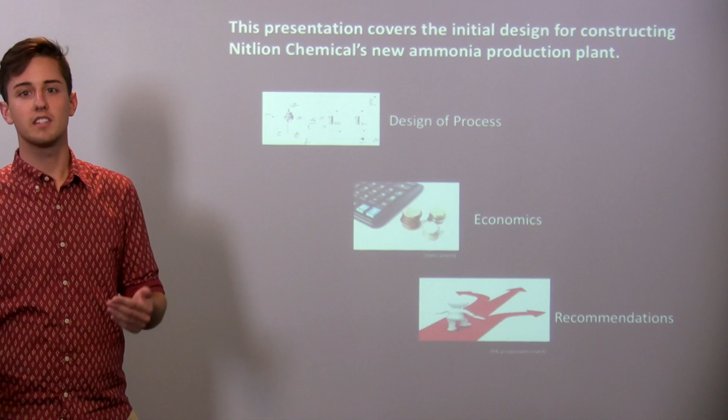This presentation covers the initial design for constructing our ammonia production plant. We're going to cover the design process, economics, and recommendations that we have to continue with the design after our team is finished. Andrea is going to talk to you a little bit about some background for our plant.

Nitlion Chemical is planning to produce an ammonia production plant in Philadelphia. We're hoping to produce ammonia at over 87,000 pounds per hour. We chose Philadelphia as a location for our plant because it's right along the Delaware River, which makes cooling water much cheaper, and cooling water is one of our biggest utility costs. Also, Pennsylvania is right above the Marcellus Shale, which makes a methane feed much cheaper.

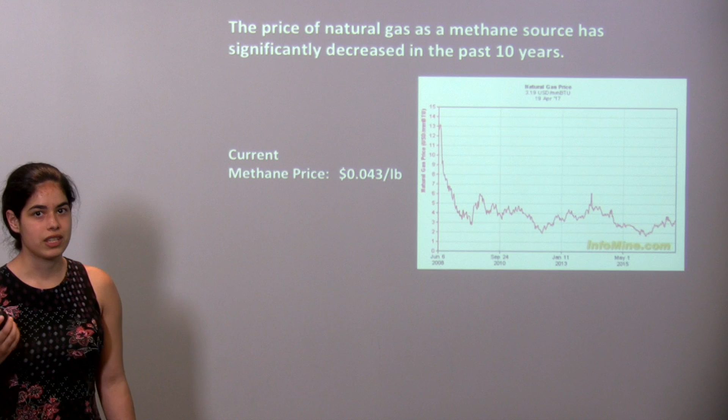Methane has been decreasing in cost over the past 10 years, mostly due to increased fracking and fracking technologies. It is now at 4.3 cents per pound.

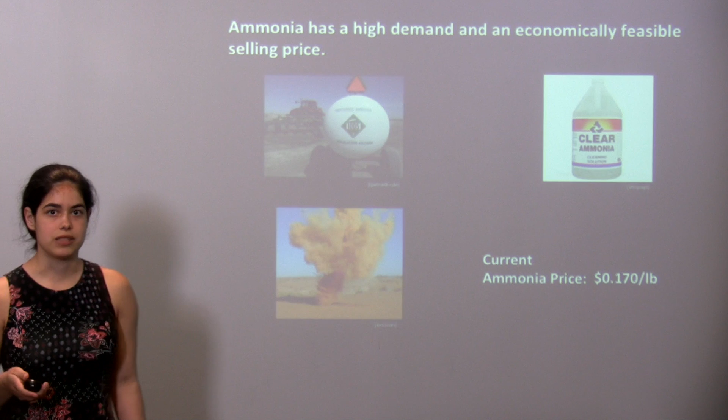Ammonia has many different uses. The main ones are fertilizer for agriculture, explosives, and different chemicals like cleaning detergents.

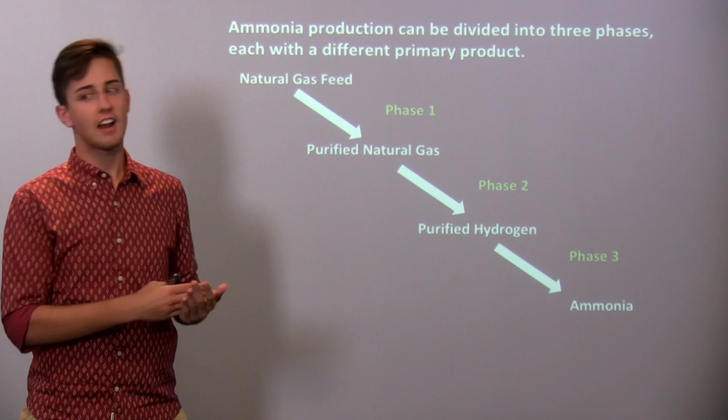Our ammonia production process is divided into 3 phases, each with a different primary product. We take our natural gas feed through phase 1 to get a purified natural gas feed, removing some toxic components. We take that purified gas feed and make it into purified hydrogen, required for the last step - that's phase 2. In phase 3, we take that purified hydrogen, combine it with nitrogen, and make our ammonia product.

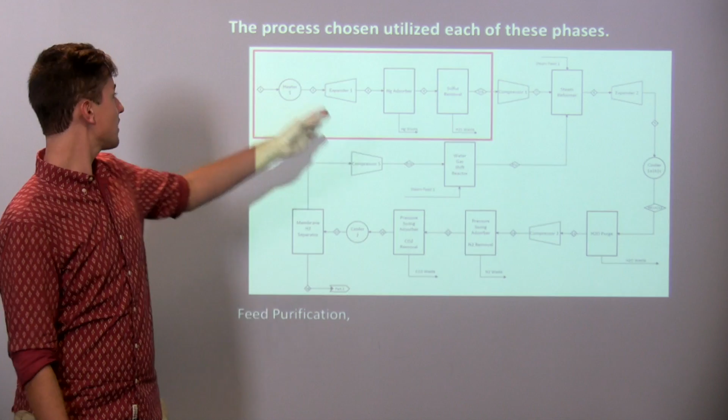Each of these phases is presented here in our block flow diagram. You can see phase 1, where we're purifying the feed, phase 2, where we're synthesizing our hydrogen, and phase 3, where we are synthesizing our ammonia.

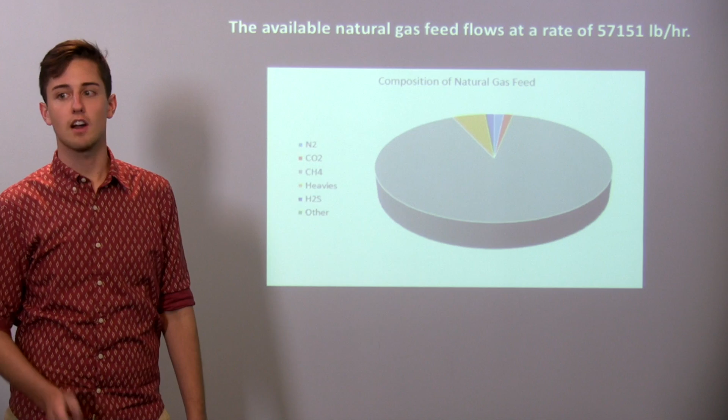Our natural gas feed is available at 57,151 pounds per hour, and it is mostly methane with a few contaminants mixed in and a few heavier hydrocarbon species. The first phase removes mercury and sulfur, and Andrea is going to talk to you about that.

Mercury and sulfur are incredibly toxic and corrosive to both the equipment and our catalysts. We're going to be heating up our feed and expanding it to the right conditions. Here we're going to be using zinc sulfide to remove the mercury, which we get from the removal of sulfur using zinc oxide.

It needs to be less than 1 part per million, and ours is at 0.7 parts per million. So, good.

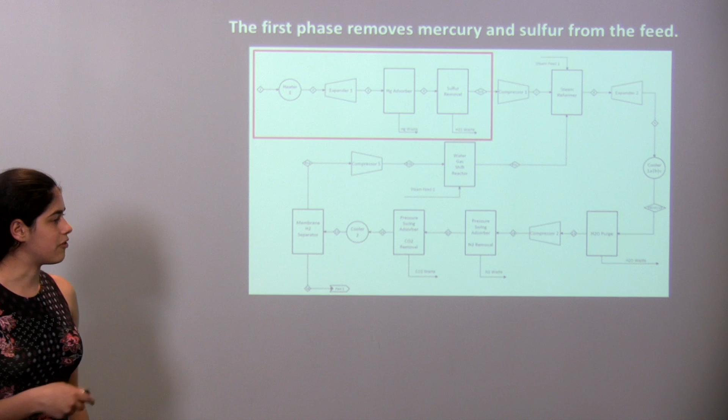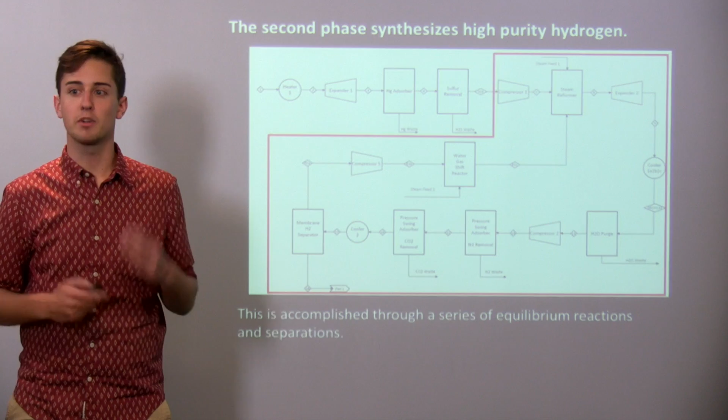With that feed purified, we're ready to move on to stage 2, which will be accomplished through a series of equilibrium reactions. The first part of that stage is our steam reformer, which is the meat of producing this hydrogen. Our steam reformer converts the methane and heavier hydrocarbons into H2 and either carbon dioxide or carbon monoxide, which we will later convert and remove from our process.

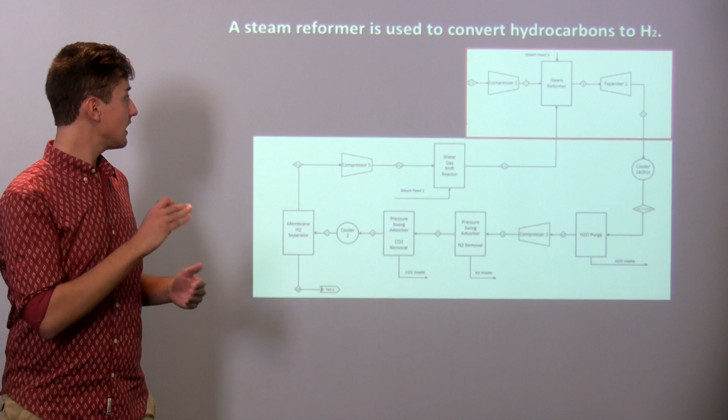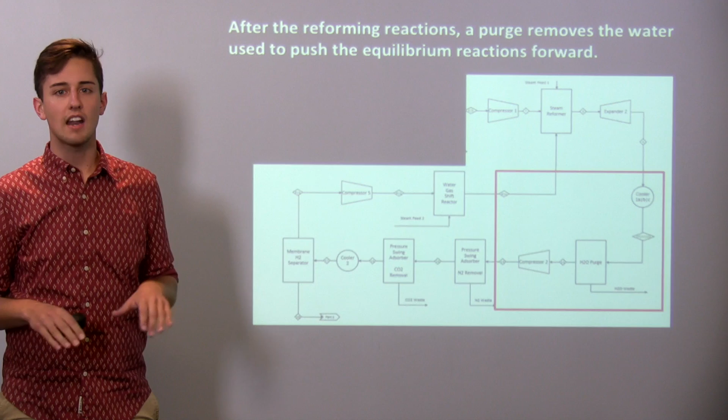That steam reformer requires a large feed stream of steam as well as the process stream, and we need to take that out in the next step in an H2O purge, because heating and cooling that water in the process stream for the rest of the process is not at all energetically favorable or efficient. So Craig is going to talk to you about our next steps in hydrogen purification.

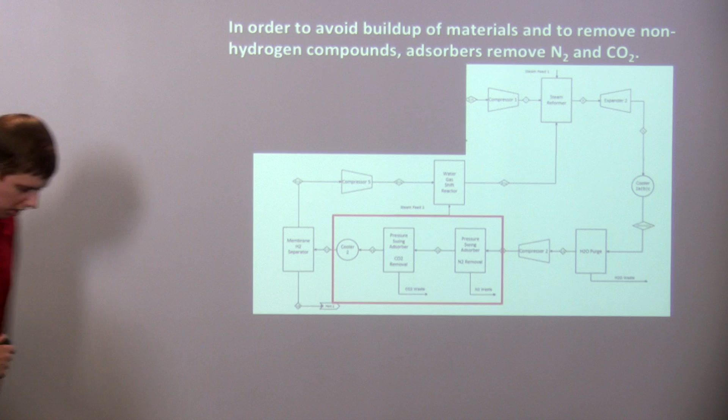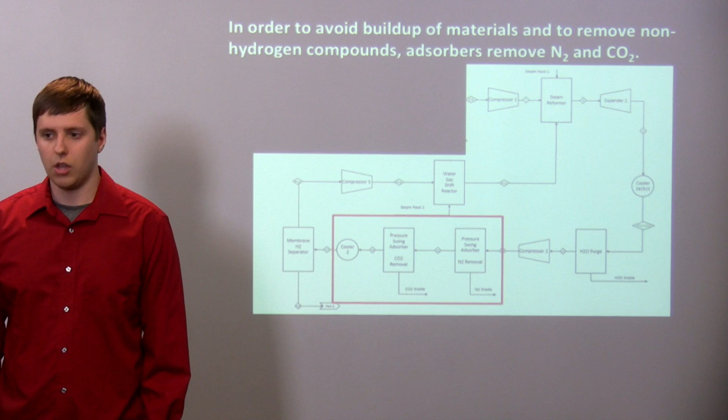At this point in the process, we have quite an abundance of CO2 and nitrogen, and they need to be removed. We're going to use pressure swing adsorbers to remove both of those products. The pressure swing adsorbers work on the basis of pressurization and depressurization to remove carbon dioxide and nitrogen, in order to get very pure amounts of our hydrogen through a membrane separator.

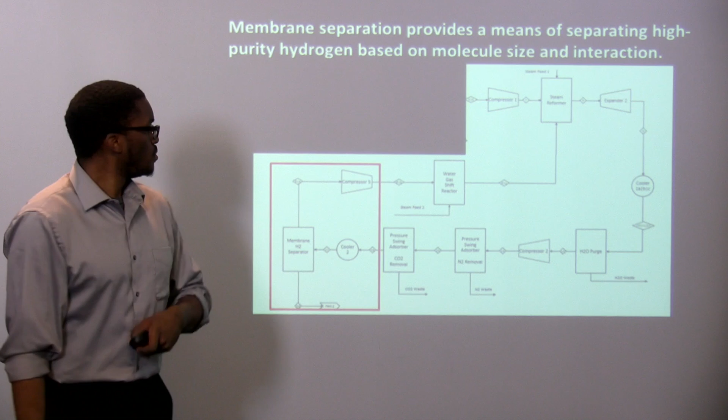We have a membrane separator after the PSA for hydrogen to get purified. This works because across the pressure gradient across the palladium catalyst, which is porous, hydrogen is allowed to pass through. Since it's such a light component compared to the rest of the components in the mixture, that's what allows us to get highly pure hydrogen, and the retentate is sent back to the water gas shift reactor, which Mike is going to talk to you about.

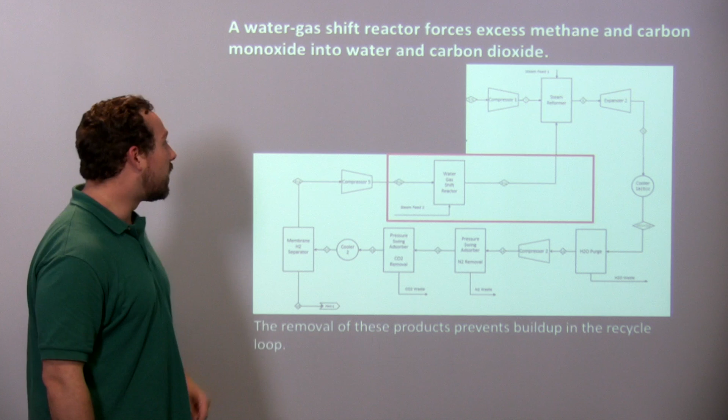Once the stream leaves the membrane separator, there's a high concentration of carbon monoxide in there. That is compressed and then sent to the water gas shift reactor, where it's combined with steam in order to have a high conversion of the carbon monoxide into CO2 and H2 gas. This will then be sent to the steam reformer. The water gas shift reactor and the steam reformer are the same pressure in order to reduce cost.

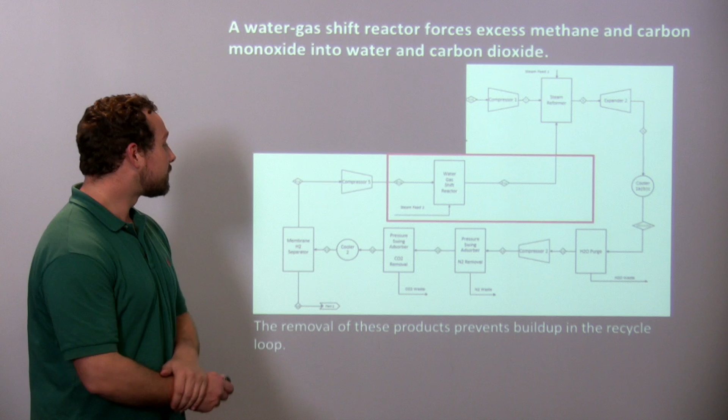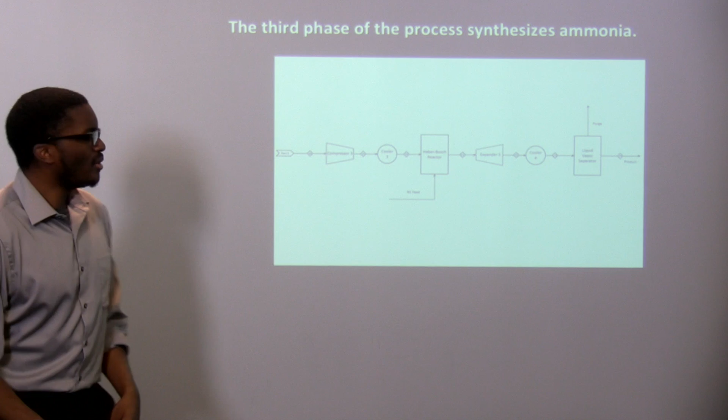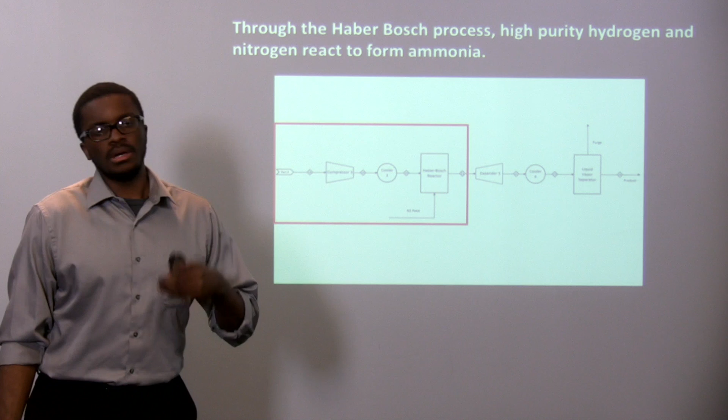So the third phase of our process is ammonia synthesis. The ammonia synthesis happens in the Haber-Bosch reactor from the previously mentioned purified hydrogen and nitrogen, which we purchased from an outside company because we have to have very low amounts of oxygen in the Haber-Bosch reactor. It's hazardous in this environment because it causes side reactions, as well as oxygen being a main reactant for combustion. That's why we need very pure nitrogen.

The purification after the ammonia synthesis happens through a liquid vapor flash separator. We're using this because ammonia is liquefied after it goes through a bit of expansion and cooling, but hydrogen and nitrogen are still in the gas phase. There are large disparities in the vapor pressures there because the boiling points of nitrogen and hydrogen are on the order of -300 to -400 degrees Fahrenheit, while the boiling point of ammonia is only -28 degrees Fahrenheit.

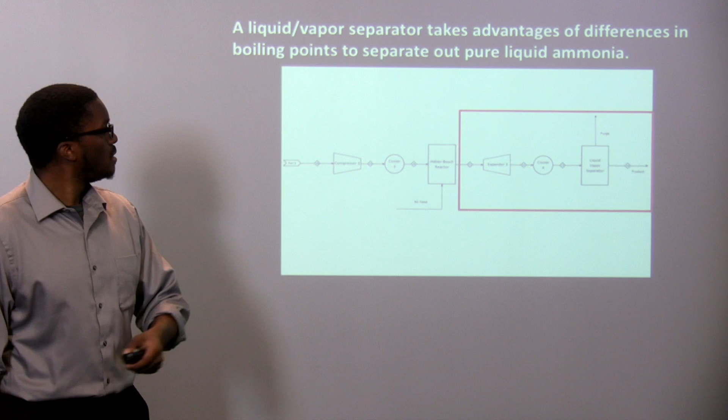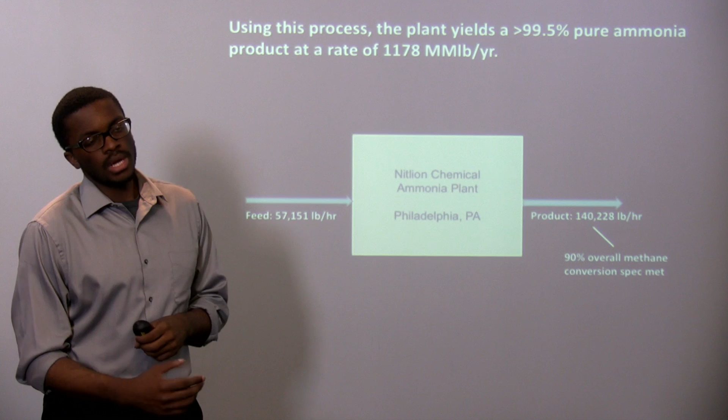This affords a product that is greater than 99.5% pure ammonia. We produce about over 140,000 pounds per hour, which is over 1.1 billion pounds per year of the product, and we did meet and exceed our target spec of converting 90% of our methane into ammonia.

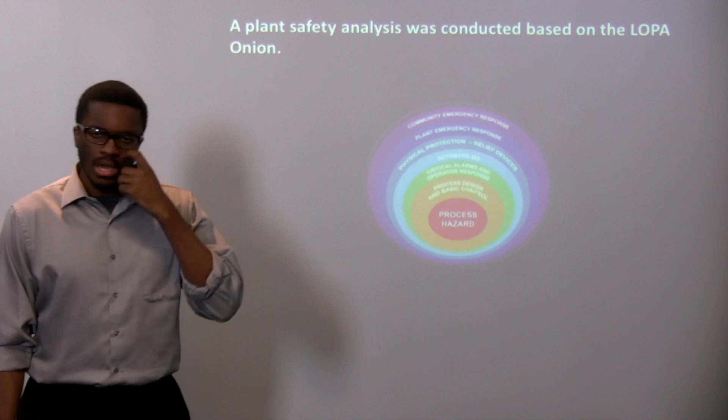Safety is definitely paramount in the design of our plant. The first layer of safety in a LOPA onion, as we reference it, is good process design. We made changes to our process to limit the number of reactors needed, as well as using substitution and moderation techniques to make the plant more inherently safe.

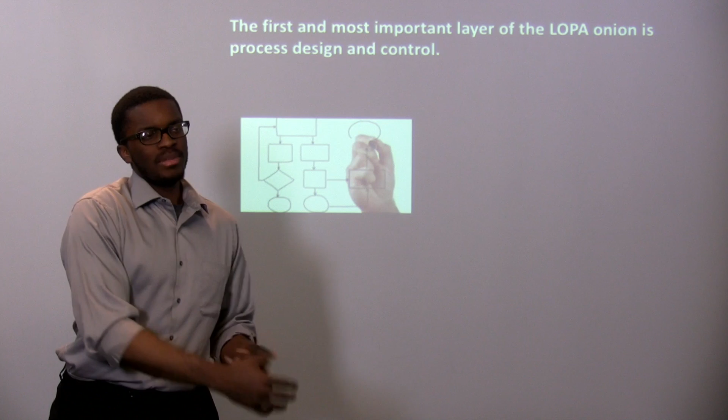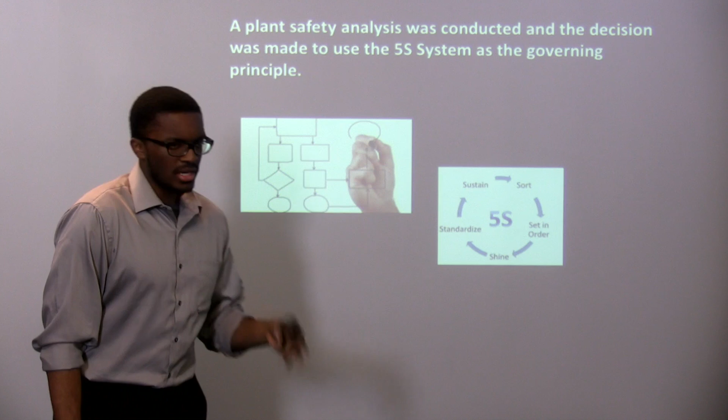Secondly, the way we run the plant, we use a 5S system as the culture around the plant. So whenever you're working, make sure to set things in order, shine, standardize, and sustain, and do all that after you sort.

The last phase of safety, which we hope things never come to in order to prevent accidents, is our PPE. We have certain PPE you have to wear while on the floor in the manufacturing plant: a hard hat, eye protection, ear protection, as well as long sleeves. When handling hazardous waste or hazardous products such as ammonia, you have to wear level A protection, which is outlined by the EPA.

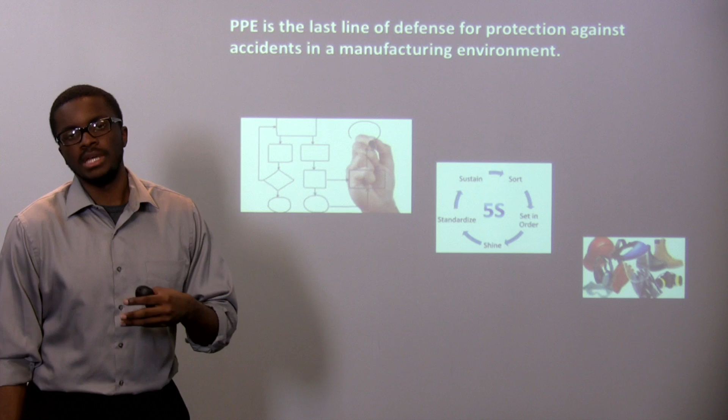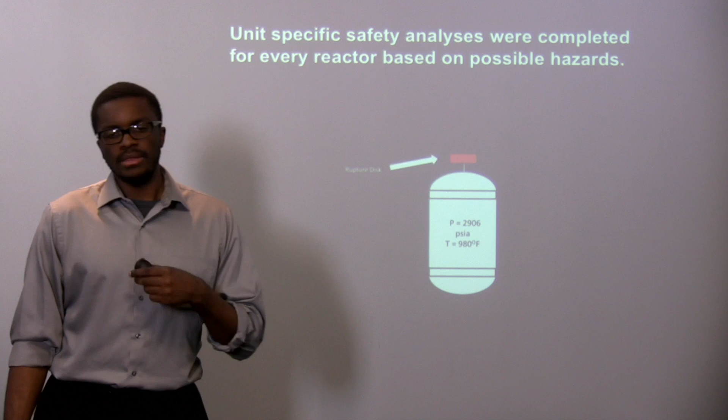We also did unit-specific safety analyses. An example is the Haber-Bosch reactor, where you have very high pressures and temperatures near 1,000 degrees and pressures over 2,900. What we did was attach a rupture disc, a pressure gauge, and a spring relief valve. The rupture disc is there for when you need a large venting area. Rupture discs can't measure pressure, so that's why you have the pressure gauge to check the bursting pressure of the disc. Lastly, the spring load relief valve is there for more relief to the outside.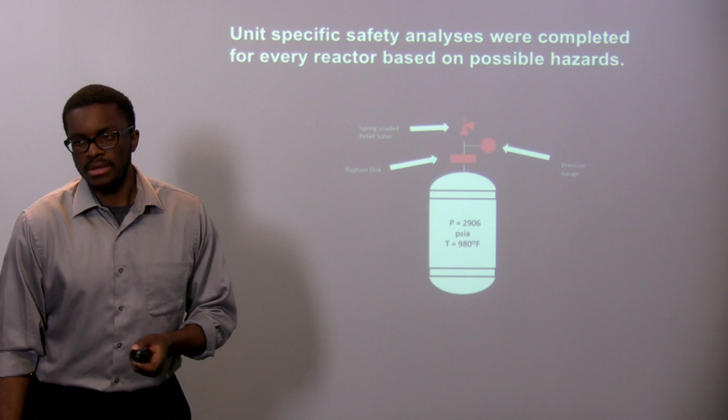Now I'm going to pass the mic for the second layer of safety, which is controls. Thank you, James. Going hand in hand with safety controls is process control. We have two types of control: temperature control and pressure control. In bypass control, we have a process heat exchanger, and we split the inlet feed, controlling the rate of the feed split back into the exit stream in order to change the temperature when the temperature control and sensor senses deviance from the set point.

We also have direct control, where the exit stream is measured by the temperature control sensor, and then the stream of cooling water is increased or decreased depending on whether the temperature needs to be increased or decreased.

In pressure control, they both work fairly similar. The exit stream is measured, the pressure control sensor senses a deviance and sends a signal to the valve. The valve is increased or decreased depending on whether the pressure needs to be increased or decreased.

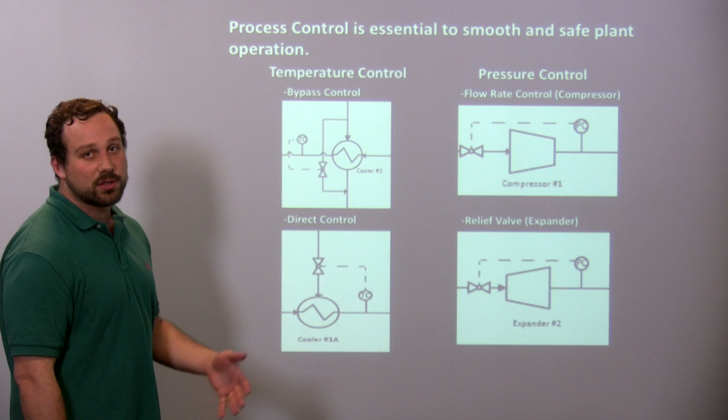I'll hand it off to Matt with some alternative studies.

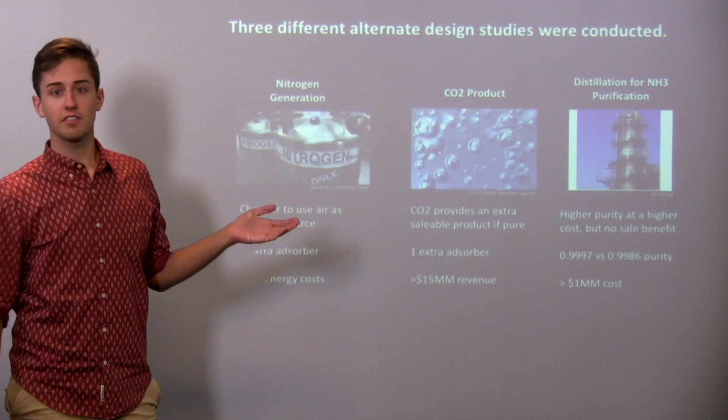We conducted a few alternative studies just to make sure we were really having the best process we could have. We looked at generating our own nitrogen for the plant, generating a CO2 product as a profitable byproduct we could sell, and distilling the ammonia feed instead of using the liquid vapor separation.

The nitrogen generation had very high energy costs, so we nixed that idea. The distillation provided us with more pure ammonia, but since the ammonia was already at the purity spec and we weren't getting any more profit from selling it, we decided the liquid vapor separation was just okay.

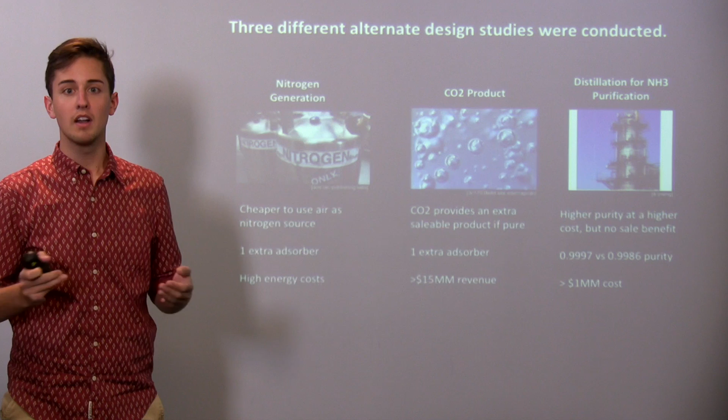The CO2 product was something we would recommend further development on, as it had a probable revenue of $15 million per year extra just by harnessing one of your waste feeds through another pressure swing adsorber, which are pretty energy efficient.

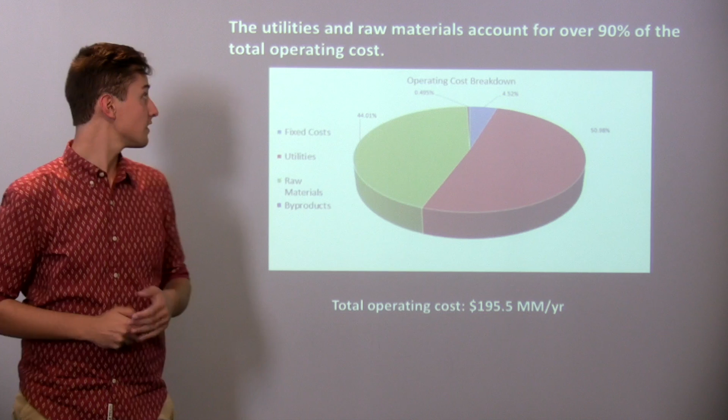Looking at our operating costs, our utilities and raw materials accounted for over 90% of our total cost. The other small percentage is made up of byproducts and fixed costs, such as taxes and other similar things. We operate at about $200 million per year.

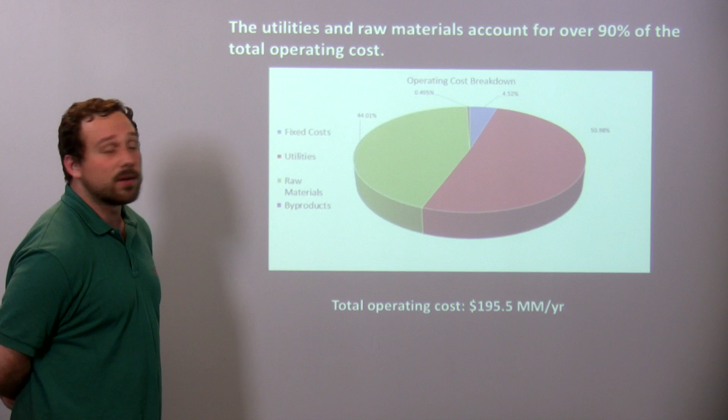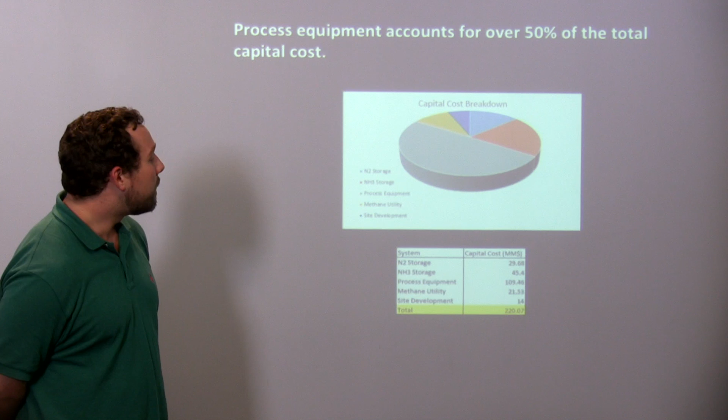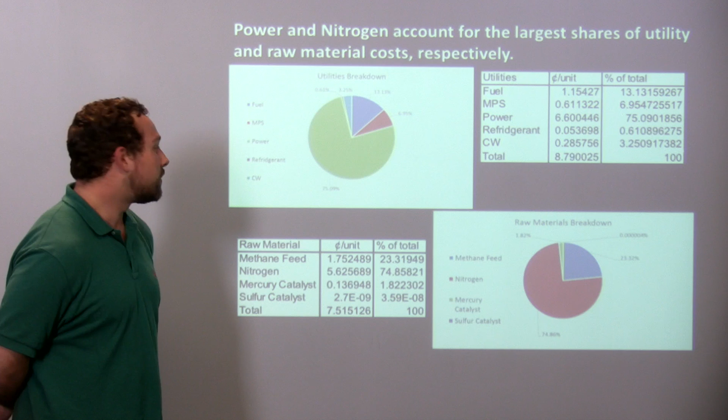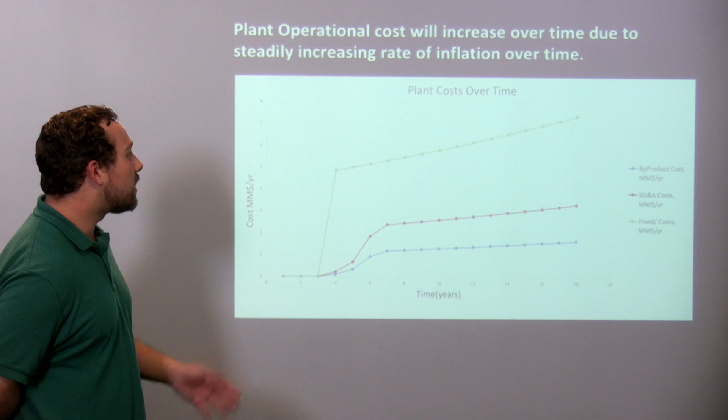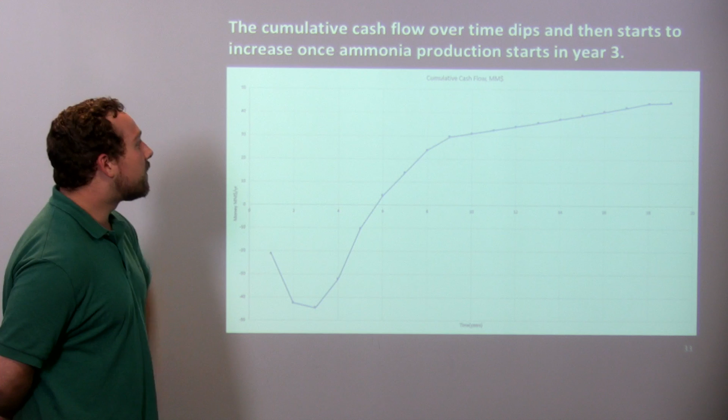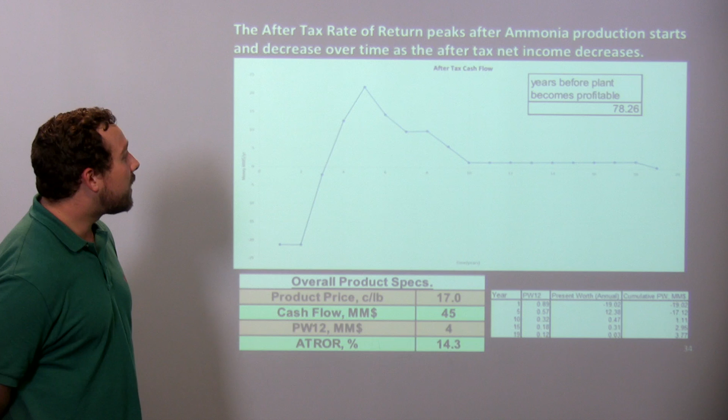And now I'm going to hand it off to Craig.

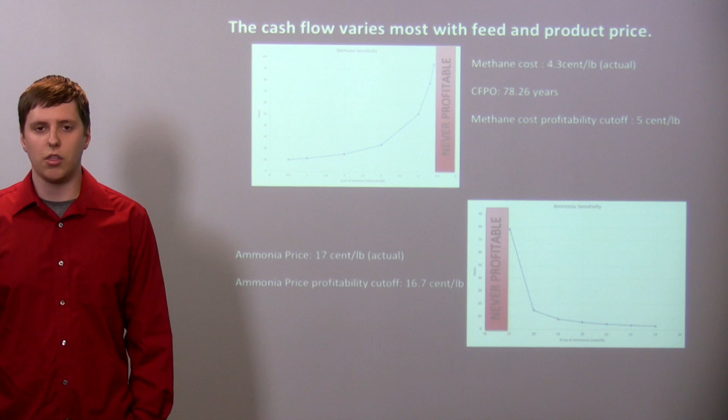Now I'll hand it off to Matt. With that being so close to the profitability line, I think among the other cost evaluations, Team 35's ammonia production plant really just needs some more development, or some large market changes, which could happen with ammonia trends going up and methane trends going down.

Our overall revenue from our ammonia production was about $200 million. And so we would be making $5 million per year, which is not enough to feasibly pay off that giant capital cost. So looking into the things that we will look into next are some ways that we might counter that and improve upon it.

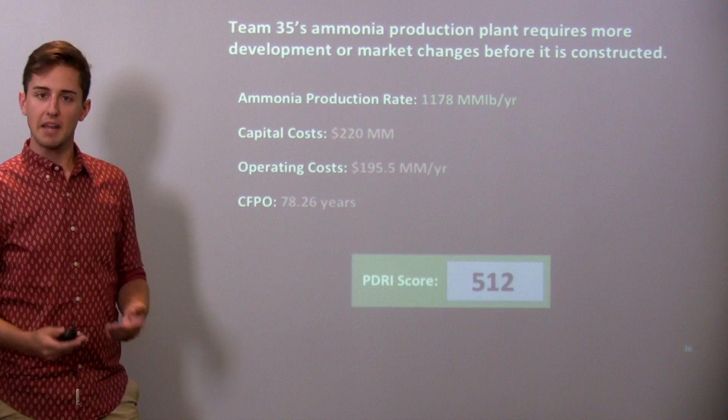So our recommendations to continue with our project will be to investigate improving the reactors and reaction kinetics. Things like temperatures and pressures are very extreme in our reactors. A lot of those temperatures and pressures, if you drop them, would come with a cost of contamination or unwanted byproducts. But an analysis on that would really yield some better results as to whether we can cut down on our energy costs via that manner and make our plant more profitable.

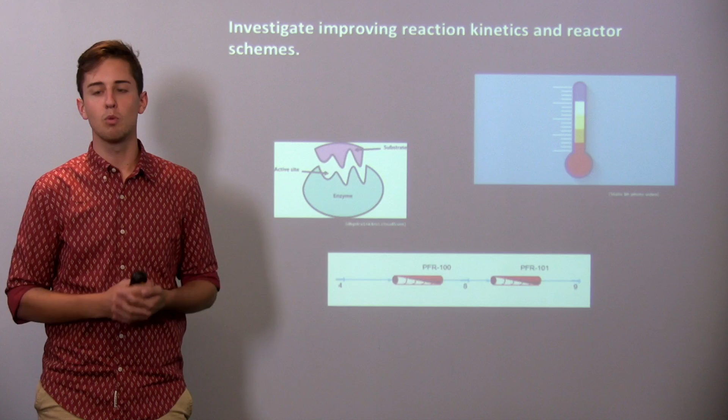That has a potential to cut down on things like the massive water stream to push that equilibrium, because each reactor will have an increasing conversion as you add them together, and you won't need that giant feed and giant energy cost with heating that to the appropriate temperatures.

We also think and recommend that you should investigate ways to better utilize energy throughout the process. Using turbines instead of just expanders would give rise to a great increase in the power exchange between things like the high duty compressors and really hot heated furnaces.

And also along the lines of the heated furnace, we think that if you drop those reaction temperatures and utilize more process heat exchange, you'll cut down on a lot of the fuel costs that are associated with heating those large streams, and that's something that would be important to our plant.